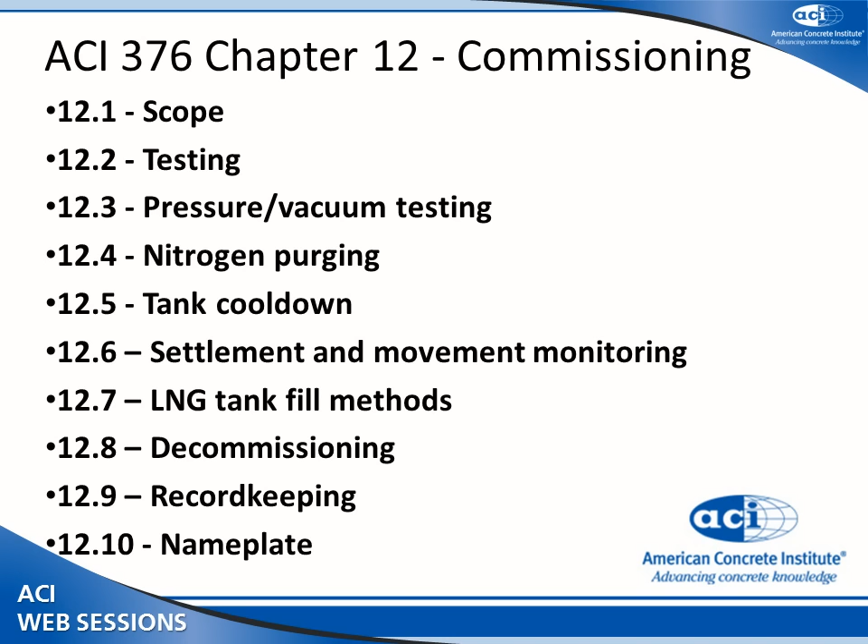What's written into the ACI code is testing of primary tanks where the inner tank is made from pre-stressed concrete. Where you have a metal inner tank, that's covered by other codes. API 620 would cover that. So testing of the primary container for leak tightness is required using either visual inspection at hydrotest, local pressure vacuum testing, or NDT methods. Typically a hydrotest is used for testing the leak tightness of the inner tank. Possibly above the hydrotest level, you can use the other methods.

Hydrotesting is required for the primary containment up to the design liquid level where the foundation conditions permit, but not less than 1.25 times the product load. So you want to test the foundation up to 25% overload. For metal tanks, sometimes they have a reduced hydrotest level due to limiting the steel thickness based on the product load rather than the hydrotest load. But for a concrete tank, it should go up to the design liquid level.

Testing for the leak tightness of the secondary containment is normally not required. As Nevin had mentioned, it's only a spill condition that should never happen, so testing for that leak tightness of the secondary containment is not done. If it was to be done, it would take a lot of special effort due to the insulation inside the tank and arrangement of the tank.

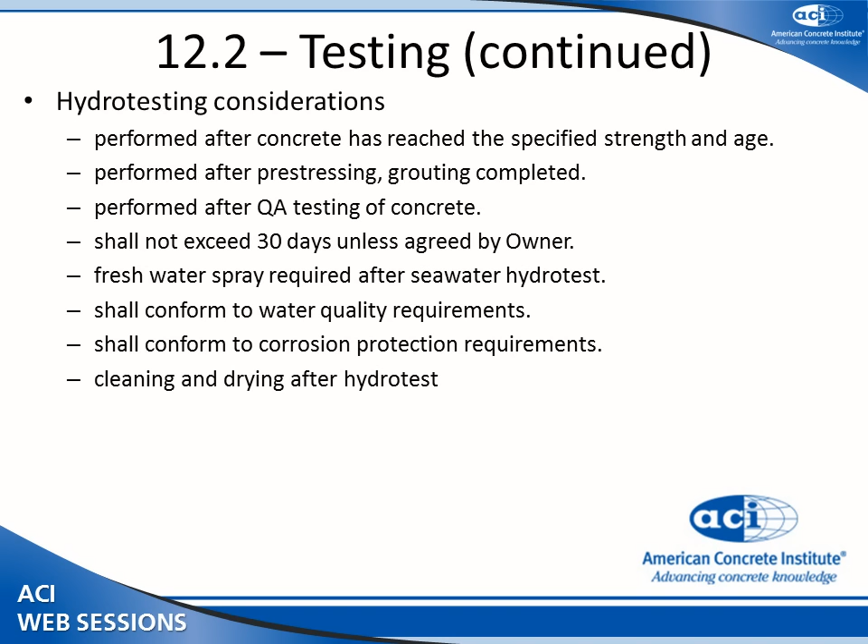Okay, pressure vacuum testing. Here we're talking about the outer containment, where the inner tank contains the liquid, the outer tank contains the vapor, and has to be pressure tested for 1 1/4 times the design pressure, held for at least 1 hour. Then the test pressure is reduced to allow for inspection for leaks. In addition, the pressure and vacuum relief valves are mounted on the tank and tested. The code also talks about the pump wells, which are tested to the piping code.

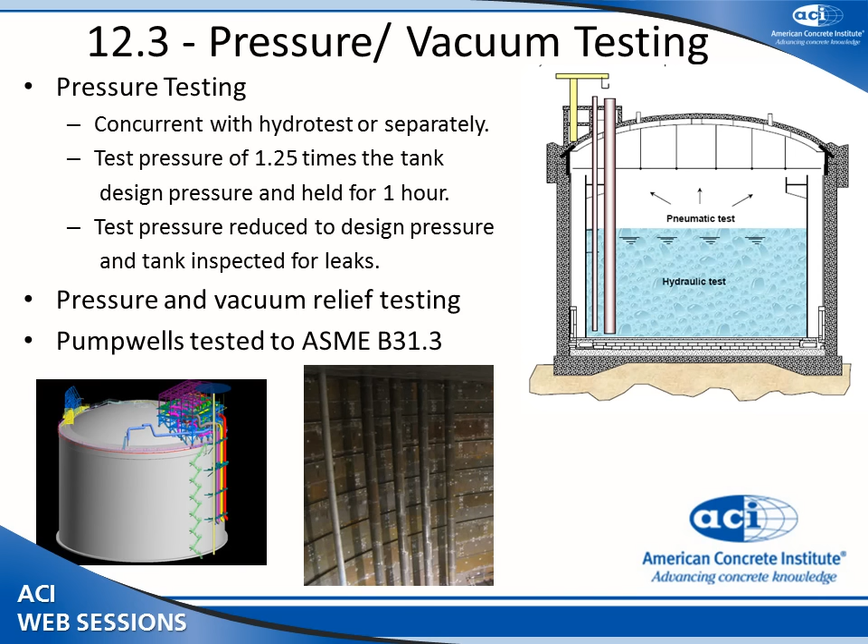Okay, after the tank is hydro tested and pressure tested, the tank is purged into service. And the idea here is to eliminate all of the oxygen in the tank to a certain level, make sure that the tank is dry. A complete procedure needs to be prepared for the purging operation. Oxygen level to be 8% or less. Tank to be dried with no standing water.

Inner tank is purged first, followed by the annular space. And it's completed when the oxygen level is less than 8% and the dew point below the required level, and held for 12 hours. And then the tank will be held under a nitrogen purge until time to cool the tank down and go into service.

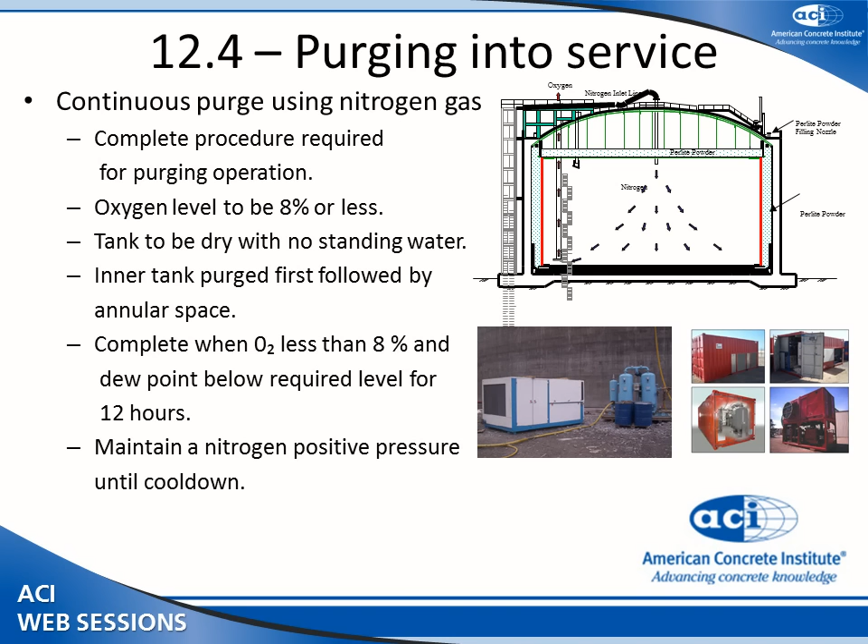And for LNG, typically, if LNG is not available, they may bring in a ship, or it may cool down with nitrogen. In any case, a procedure shall be set up to do that.

All right, settlement, movement, and monitoring. Differential settlement of the foundation before, during, and after the hydro test, and at the first fill of RLG shall be monitored. And also, that was the level monitoring system that Mike had talked about in his presentation. Also, monitor the inner tank lateral and rotational movement for use during and after cool down.

So this is something different, where you have to have some type of instrumentation inside the tank to be able to tell, when the inner tank cools down, what the movement is, as well as if that tank has rotated at all.

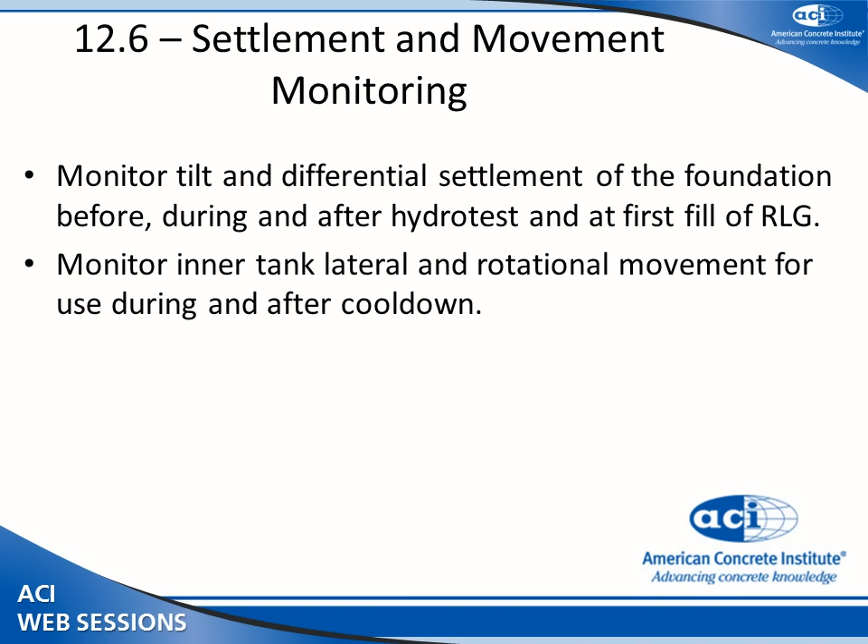All right, 12.7 is the filling methods. Typically LNG for an export terminal has a splash plate at the top, a connection at the top that allows for filling LNG at the top, where you're not worried about stratification of the LNG inside. On import terminals where you have different densities of LNG that might be brought into the tank, or long periods of time where LNG sits in the tank, typically top and bottom fill are provided.

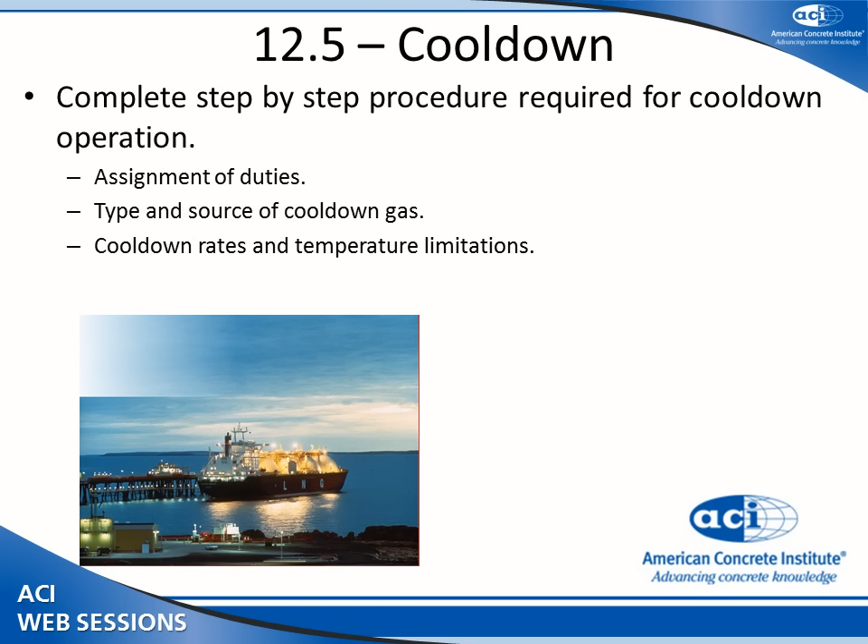It's construction of an LNG full containment tank, kind of time lapse from the beginning to the end. This was a project in Qatar that KBR built, and Mitsubishi was the tank contractor.

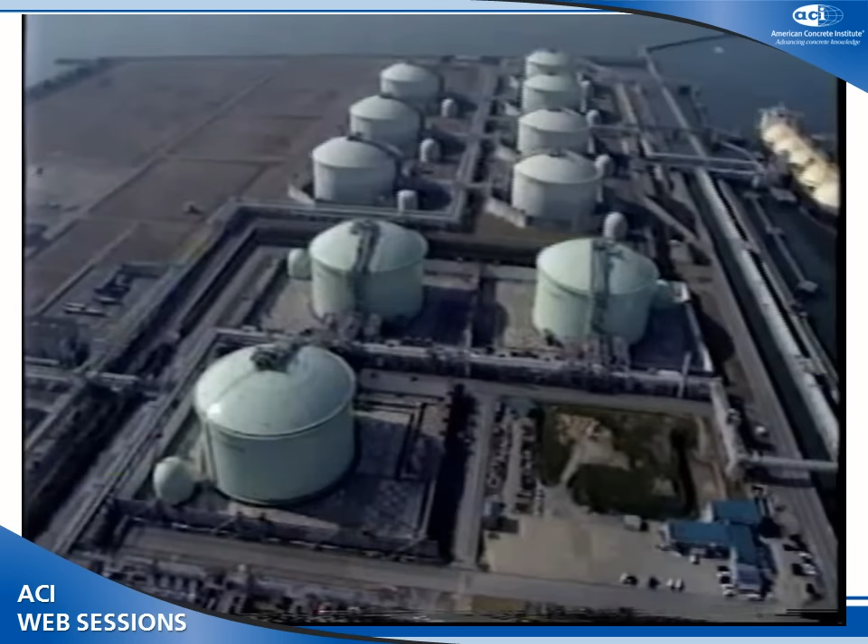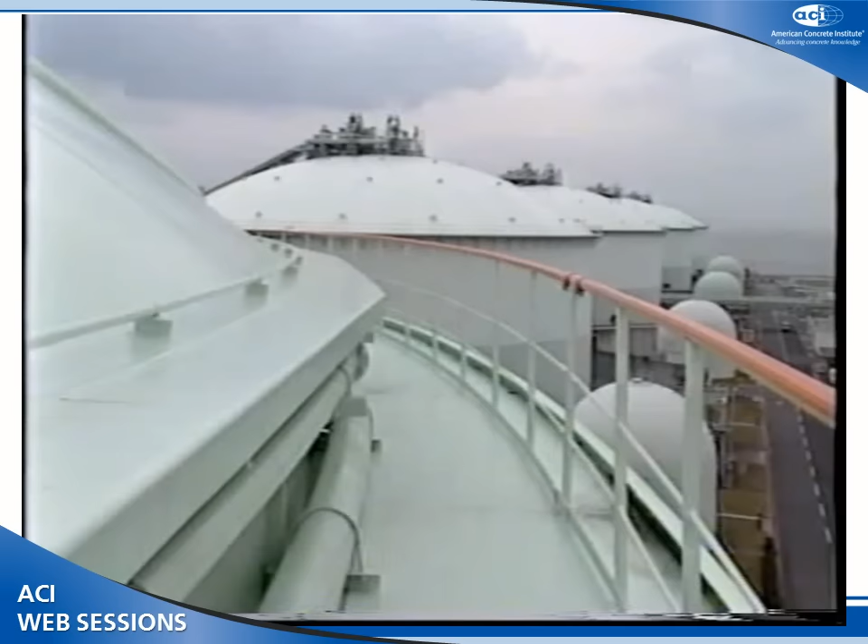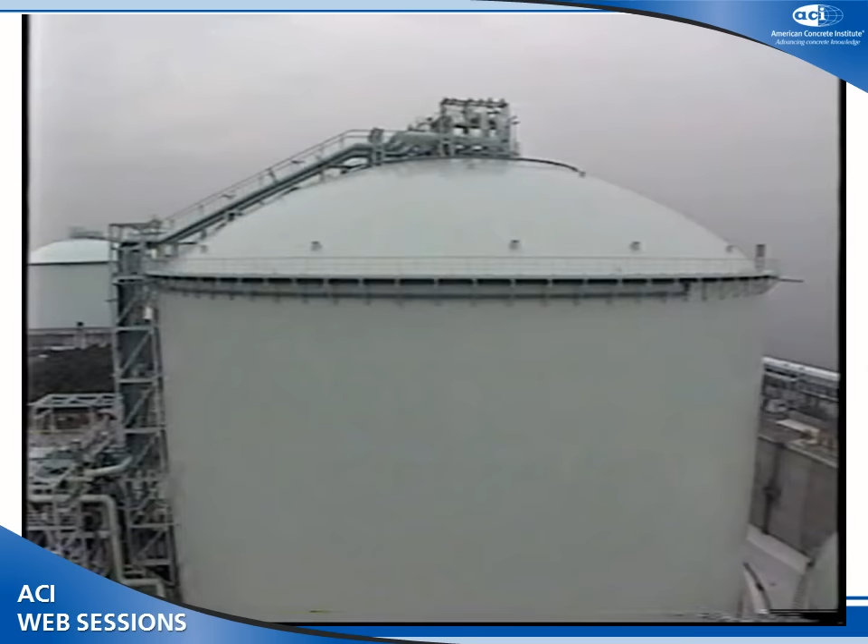LNG, liquefied natural gas. As the world becomes more environmentally conscious, demand for LNG as a clean energy source continues to grow. LNG is stored in LNG tanks at shipping and receiving terminals. As a manufacturer of LNG tanks, Mitsubishi Heavy Industries, or MHI, has completed more than 30 LNG tanks since 1977. These LNG tanks in Qatar were constructed by MHI.

The Middle East, the Persian Gulf, and Qatar. In this land of intense heat, MHI has completed 3 state-of-the-art LNG tanks. Ras Laffan LNG recognized our technology, experience, and proven track record. In 1995, the company awarded us a contract covering design to on-site construction on a full turnkey basis. Construction began in 1996, with 2 tanks completed in 1999 and the remaining one in 2000.

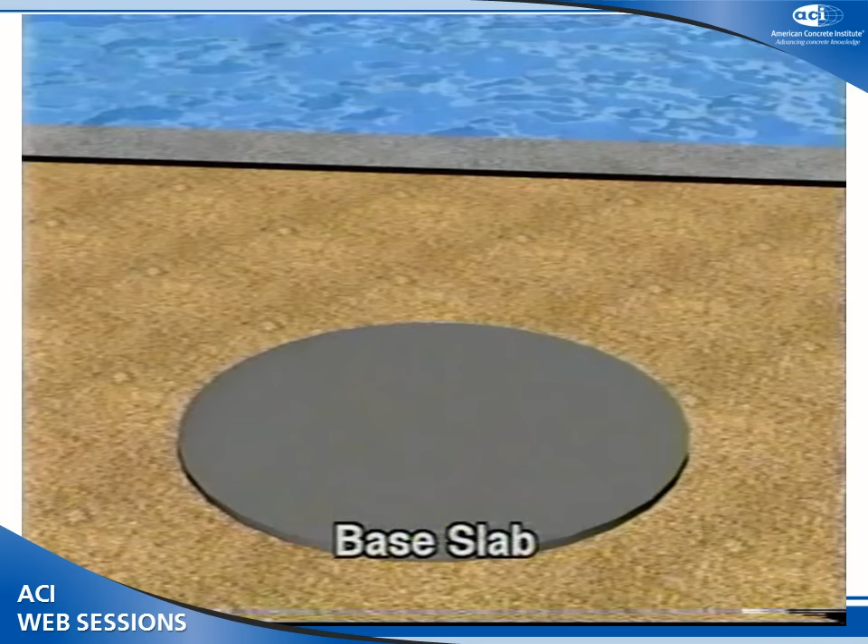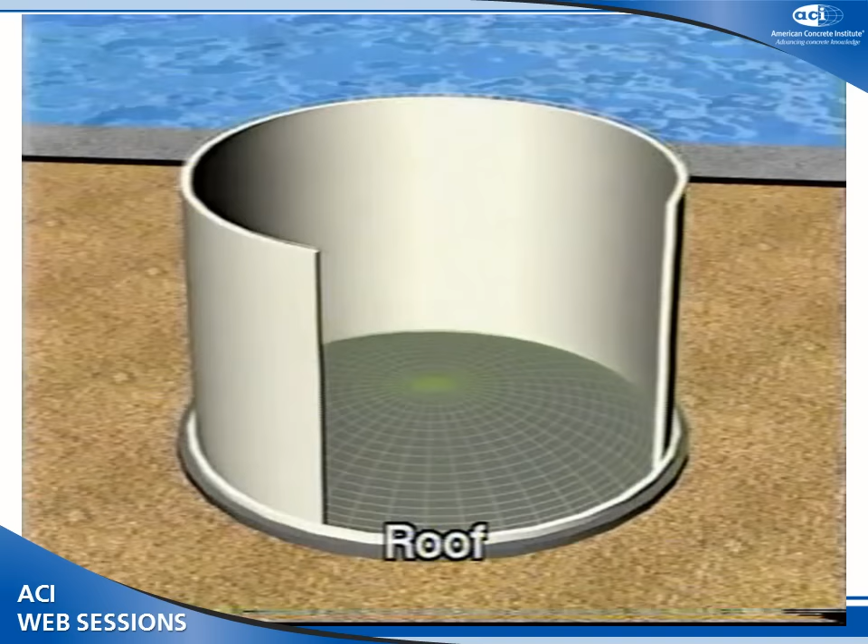Since the award of the contract, we have undertaken the design, procurement, fabrication, and construction of tanks with a capacity of 140,000 kiloliters under the plant EPC contractor JGC Kellogg.

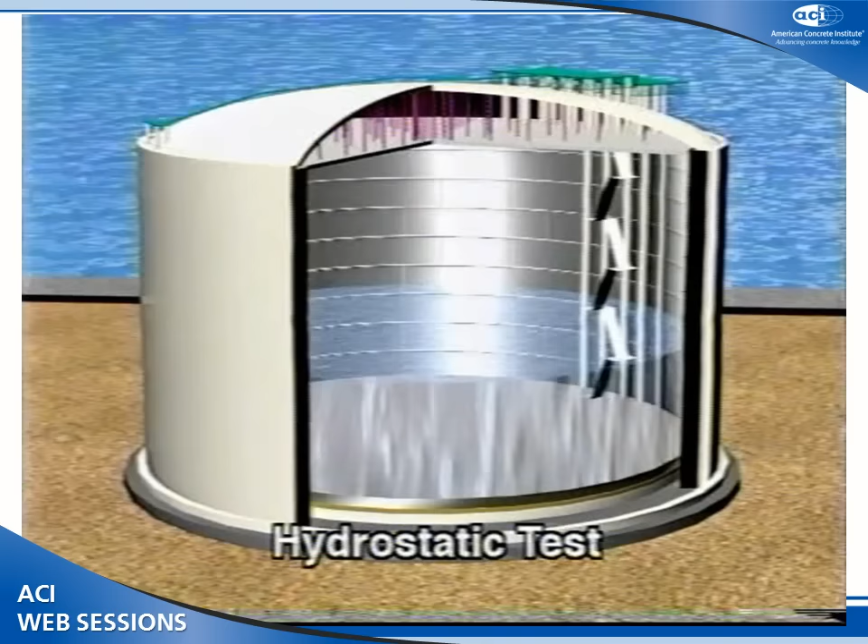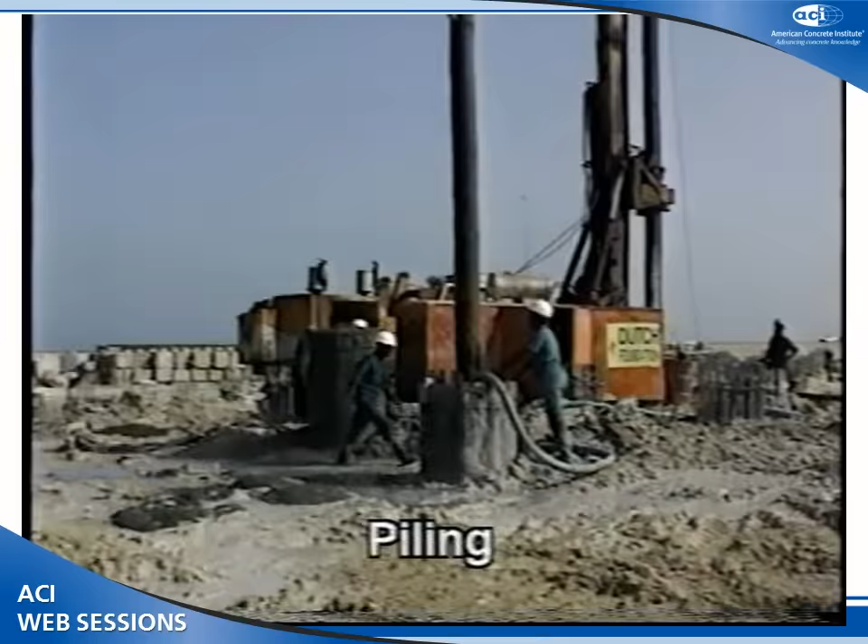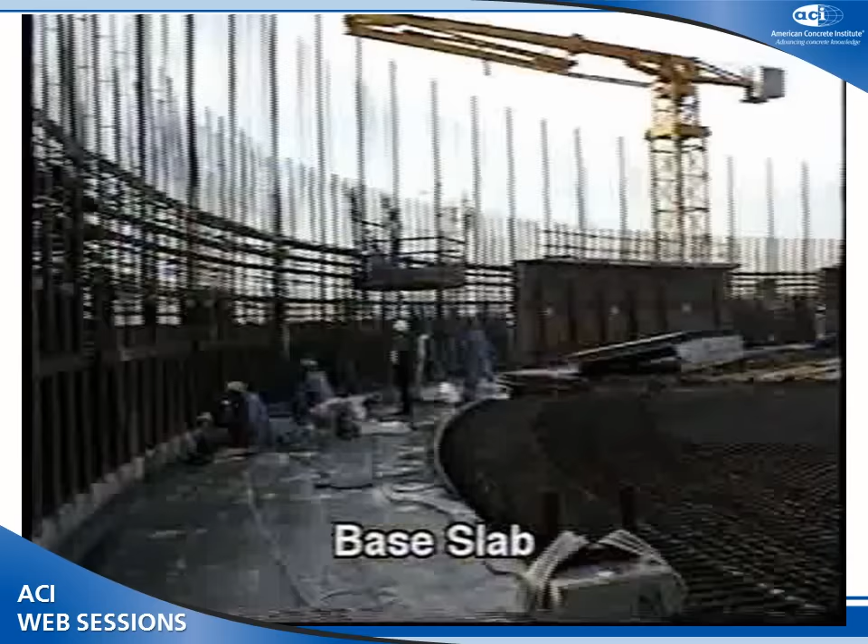Now let's take a look at the construction of LNG tanks in Qatar. Construction of LNG tanks begins with foundation work. The ground condition here in Qatar required piling. Over 400 piles are being driven into the ground to support tanks. After the piling work, the base slab construction is begun. The load of the fully filled tank is 120,000 tons. The slab plays an important role in distributing this load evenly over the ground.

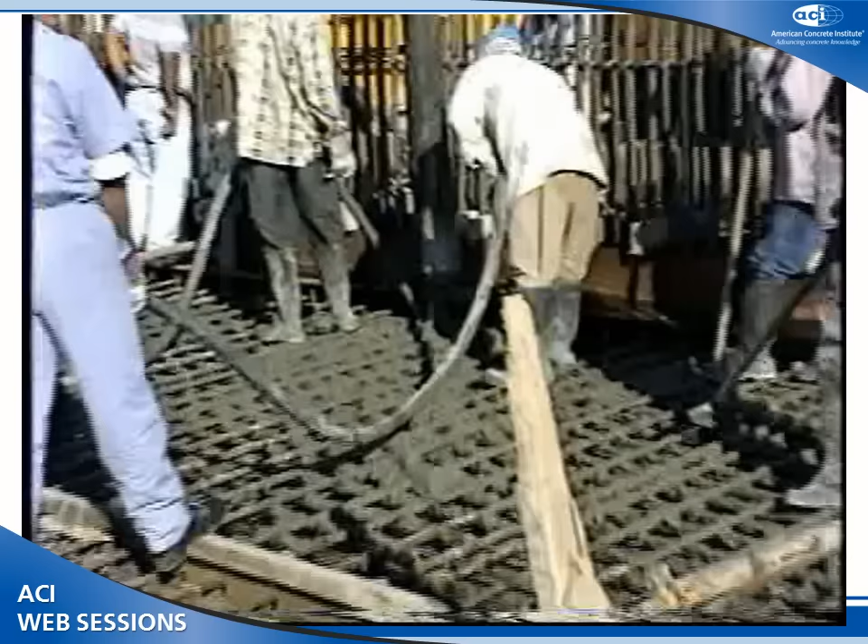The base slab work is followed by concrete wall construction, which is done concurrently with roof assembly work on the slab. After 6 months of construction, the concrete wall is raised to as high as 40 meters.

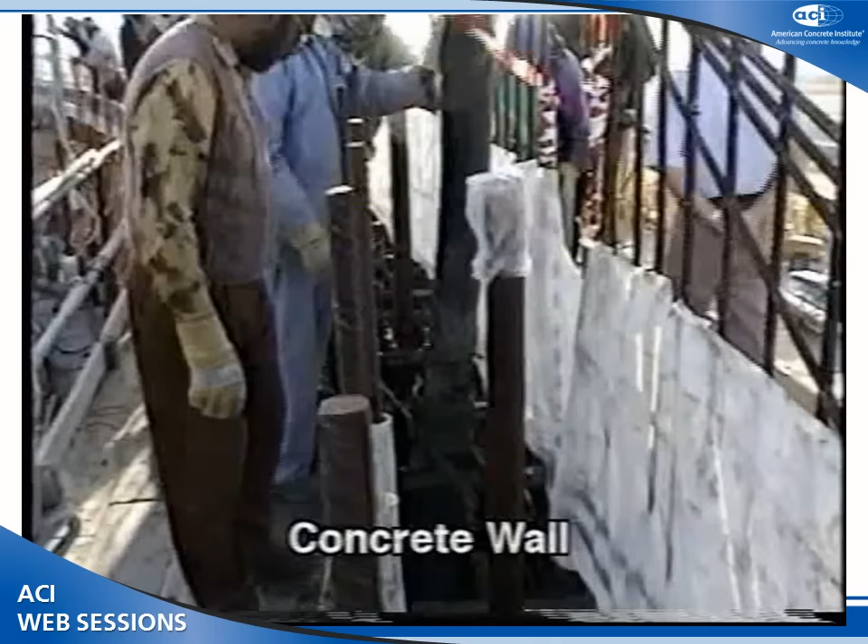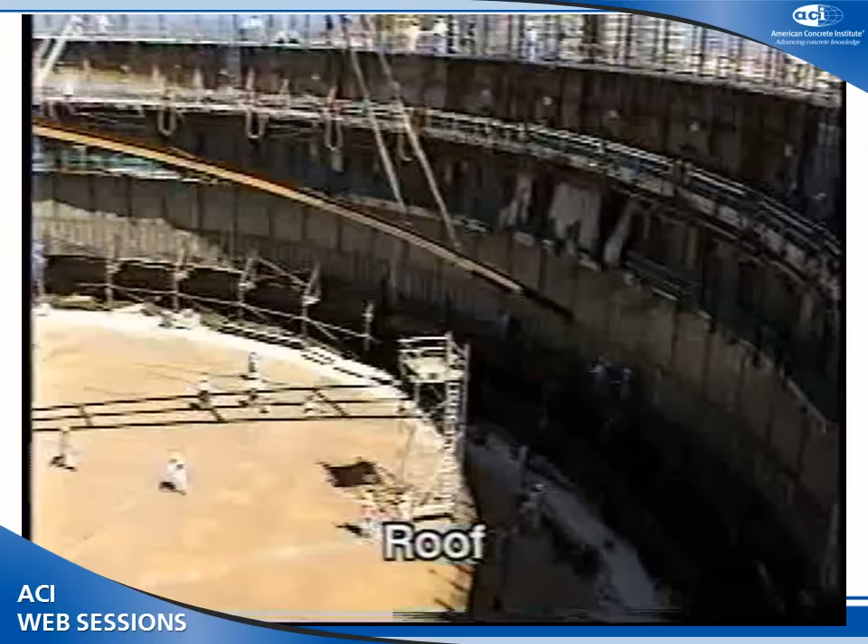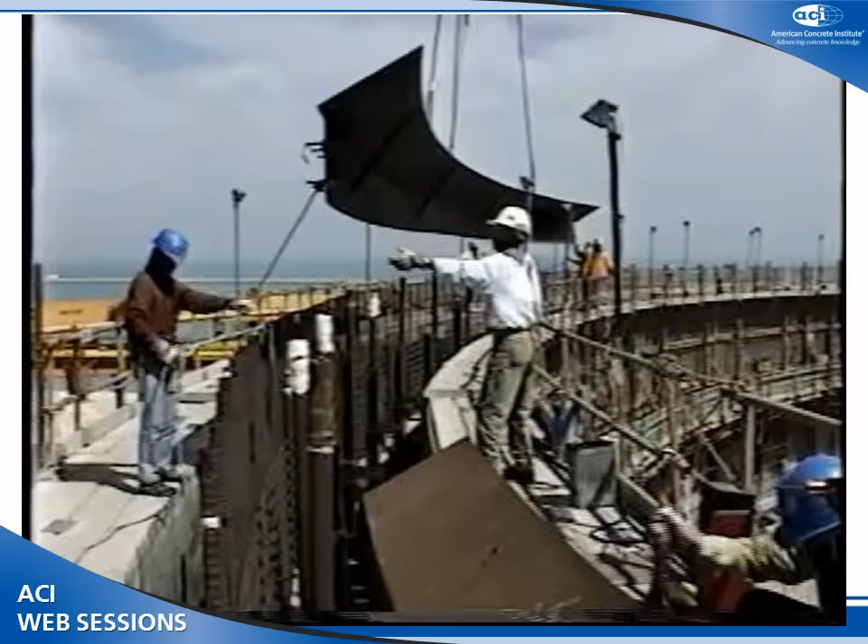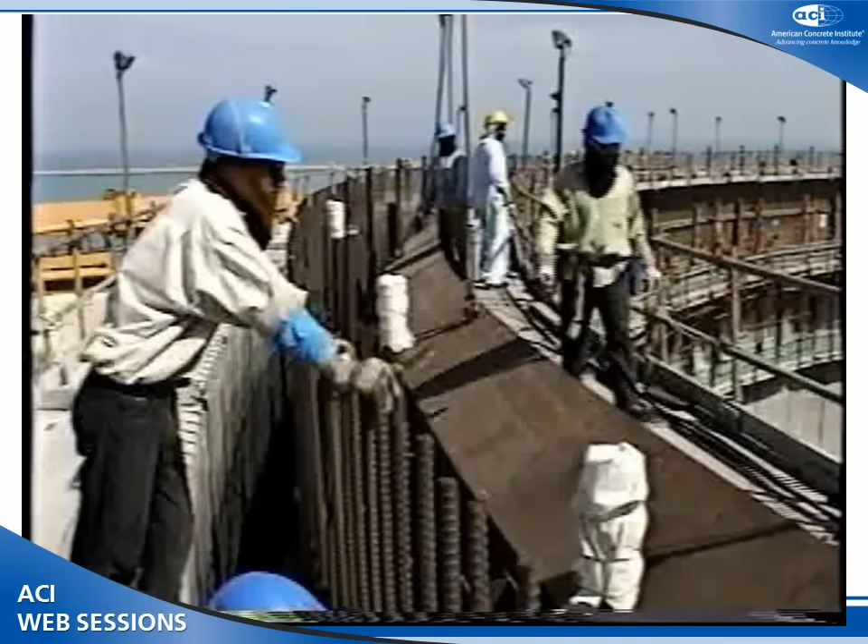Meanwhile, the roof is assembled at the bottom of the tank, surrounded by the concrete wall. The work process is optimized by carrying roof blocks in the tank. These roof blocks are temporarily built beside the tank. While the roof is being built, an aluminum suspended deck is placed beneath it, where the insulation material is to be mounted at a later stage.

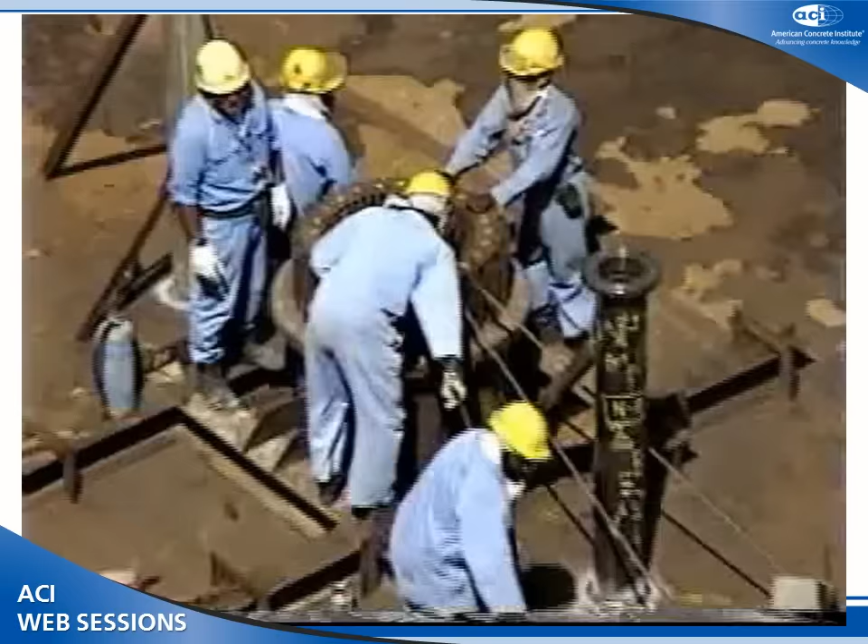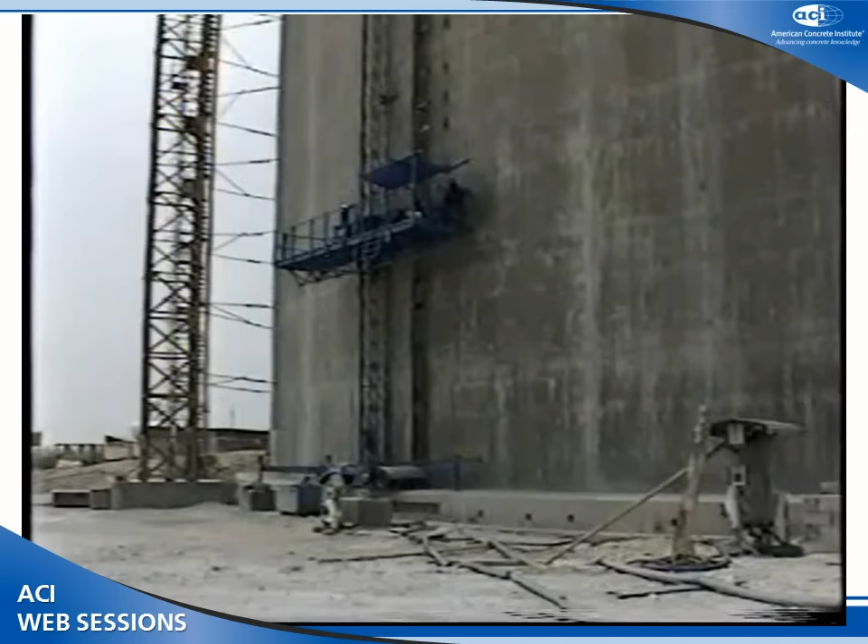The tank wall being built here uses pre-stressed concrete with extremely high rigidity. Ducts are run through the concrete during pouring, and then cables are run through the ducts when the wall is completed. By providing a set tension, the rigidity of the concrete structure is increased.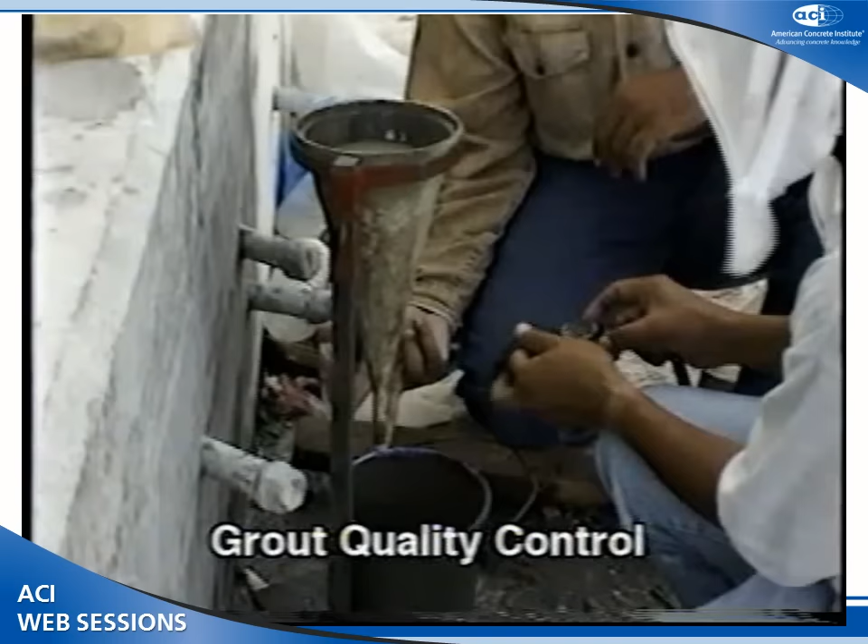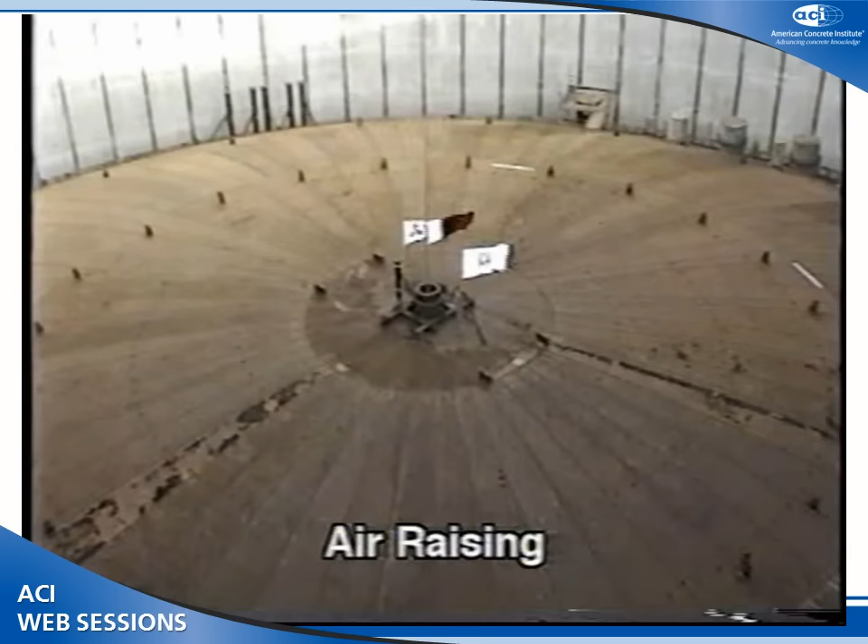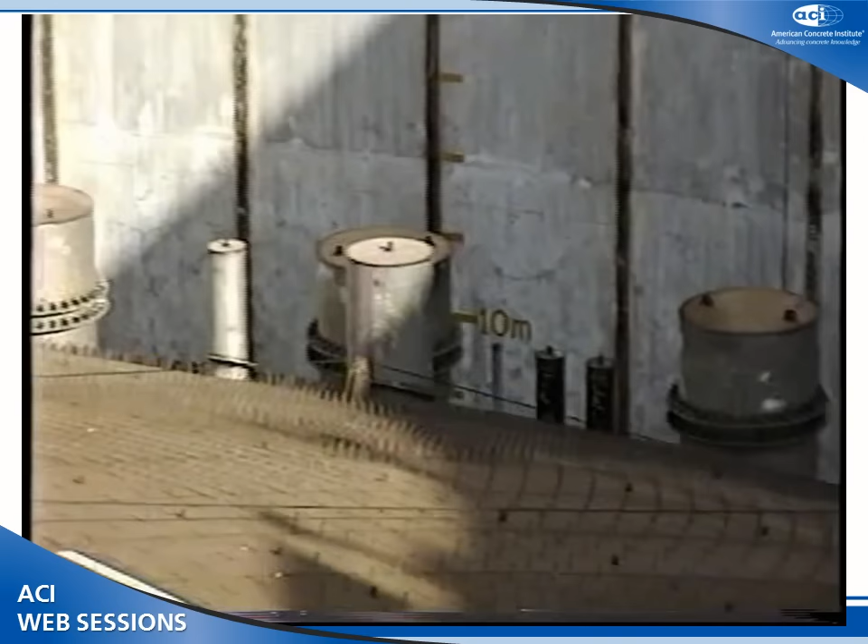The cables are installed in both the vertical and horizontal directions of the wall. When the concrete wall and the roof are completed, the roof is raised to the height of 40 meters using a technique called air raising. Air raising lifts the roof very slowly. This work continues over about 2.5 hours.

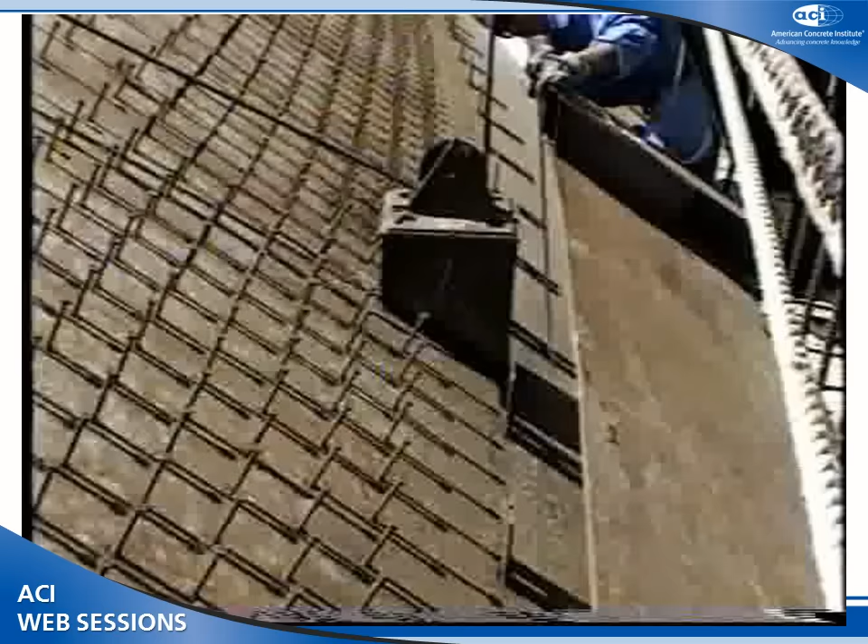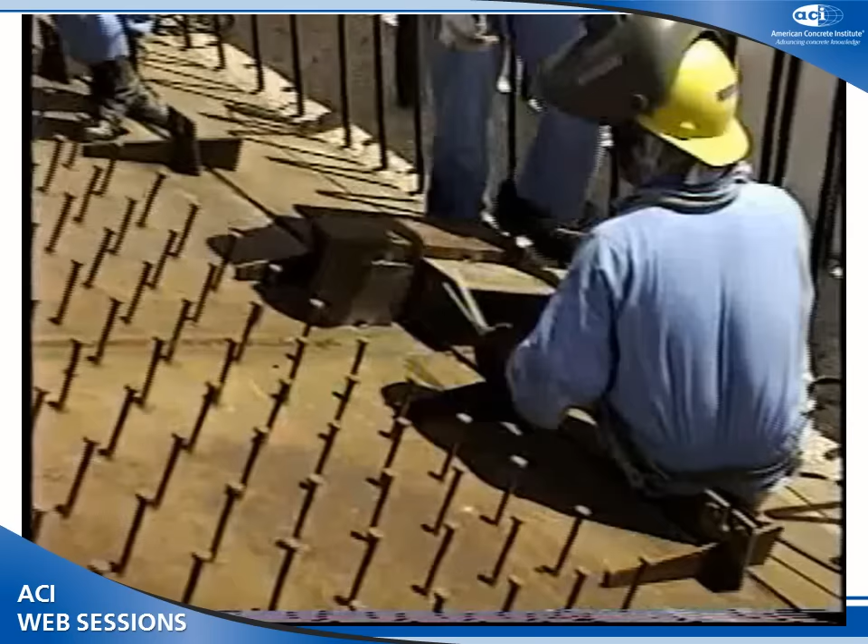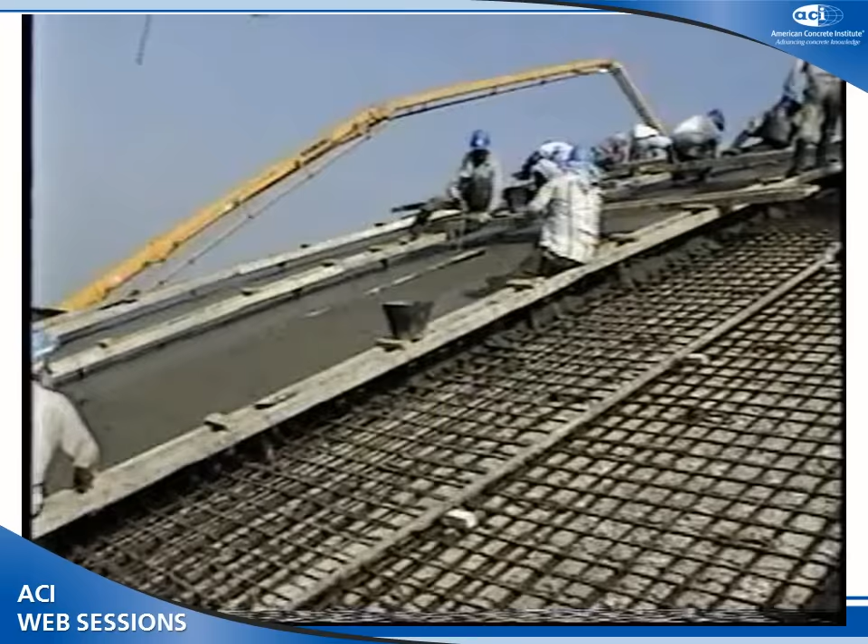The roof is fixed when it is raised to a set position. When the roof is fixed, concrete is poured on top. Next, a platform is constructed to mount the piping. Inside the tank, inner tank work begins. The inner tank stores LNG at minus 162 degrees Celsius.

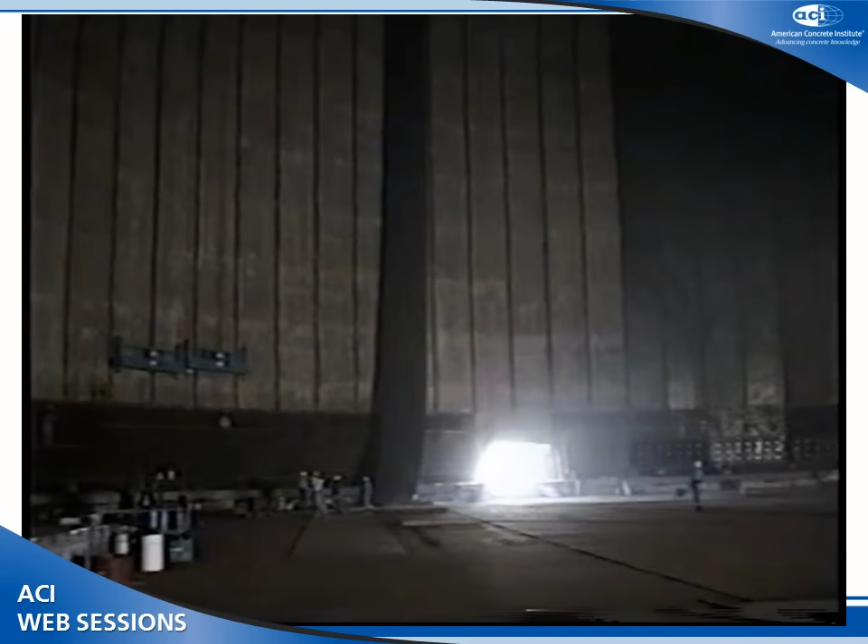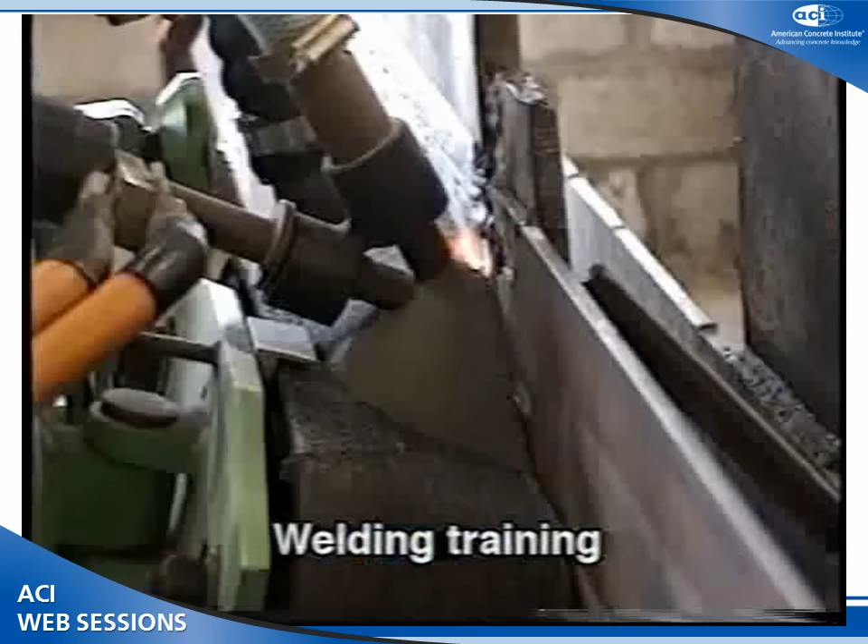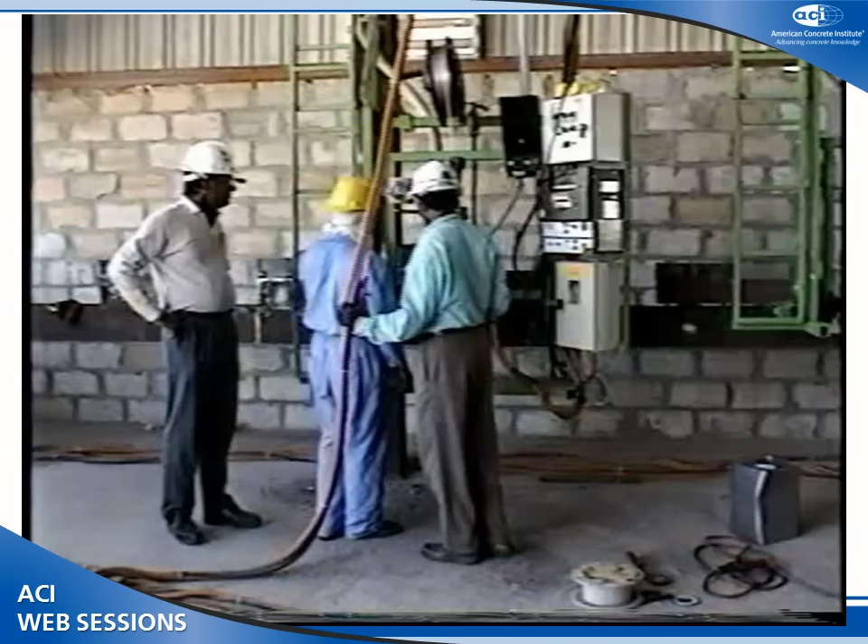For this reason, it must be made to very exacting standards. We take our utmost care to ensure the quality of welding. All welders must be thoroughly trained before they can work on a real tank. Here, workers concentrate on the work they are about to begin.

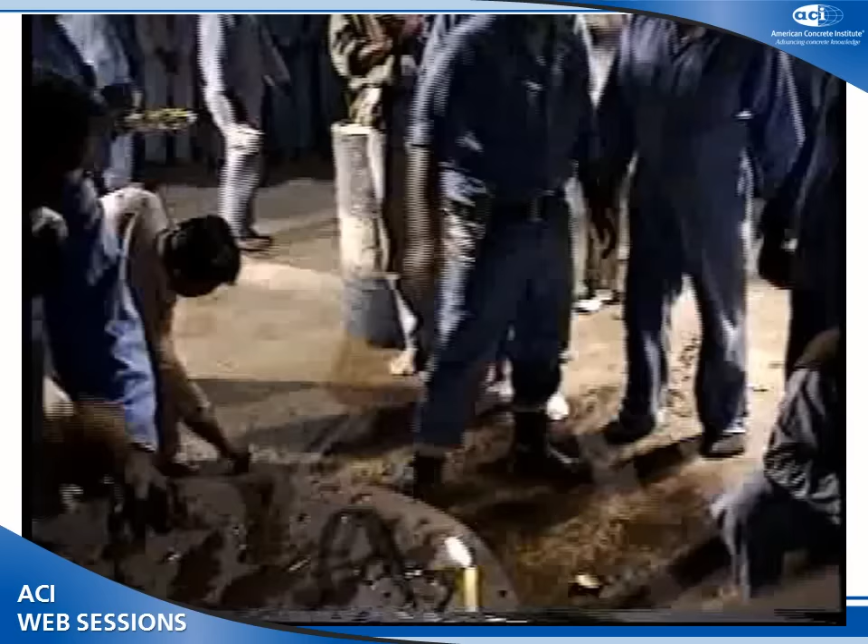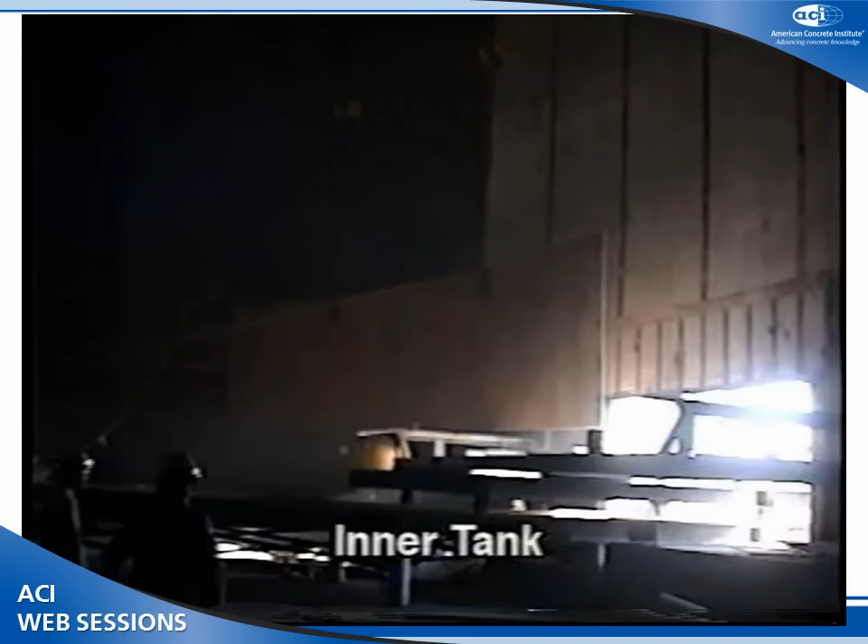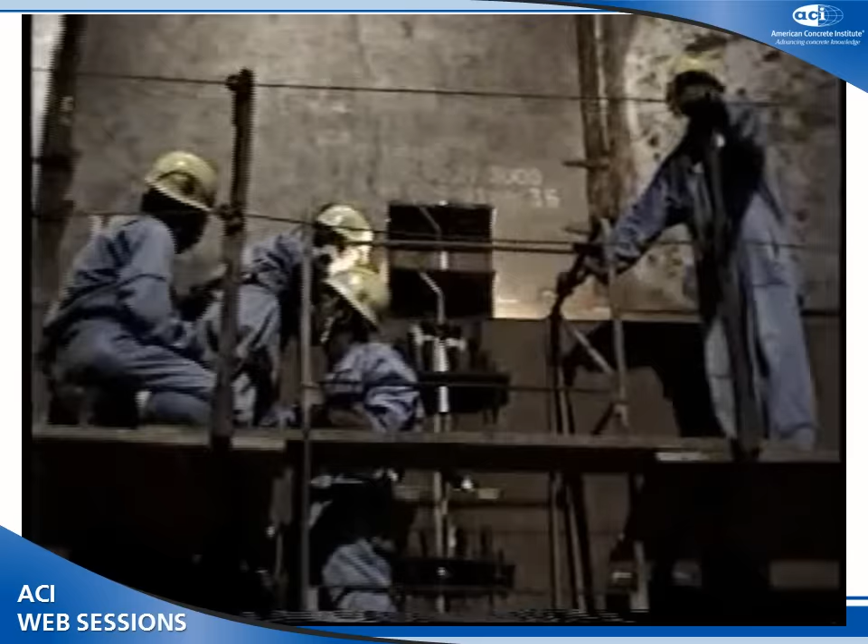The inner tank is made from a special material, which is 9% nickel steel. One by one, the pre-rolled steel sheets are brought through an opening into the tank. The delivered steel sheets are hoisted and placed in a specified position. The inner tanks in Qatar have a 10-layer structure. The construction of a tank combines many complex tasks.

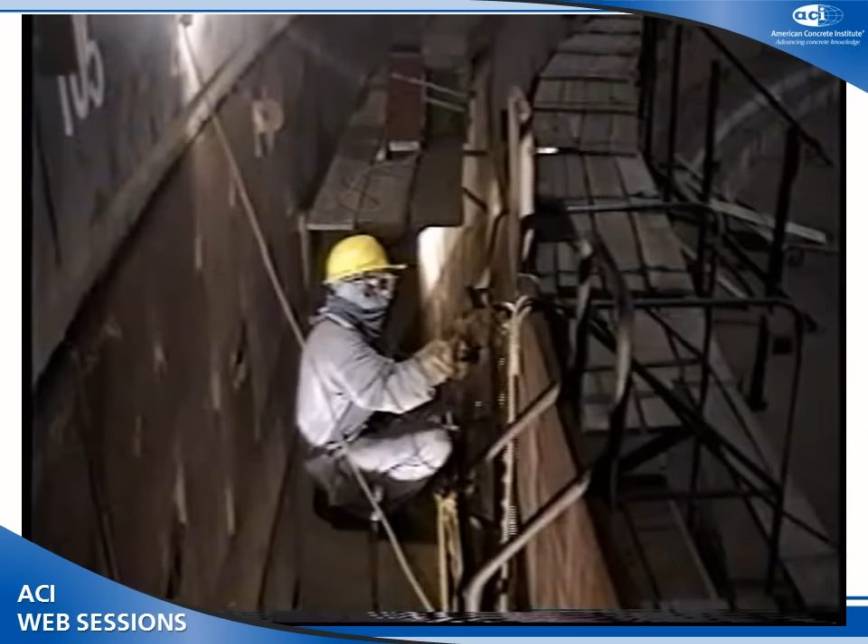While the inner tank work is underway, many different tasks are also going on outside the tank, such as piping, external stair construction, and coating.

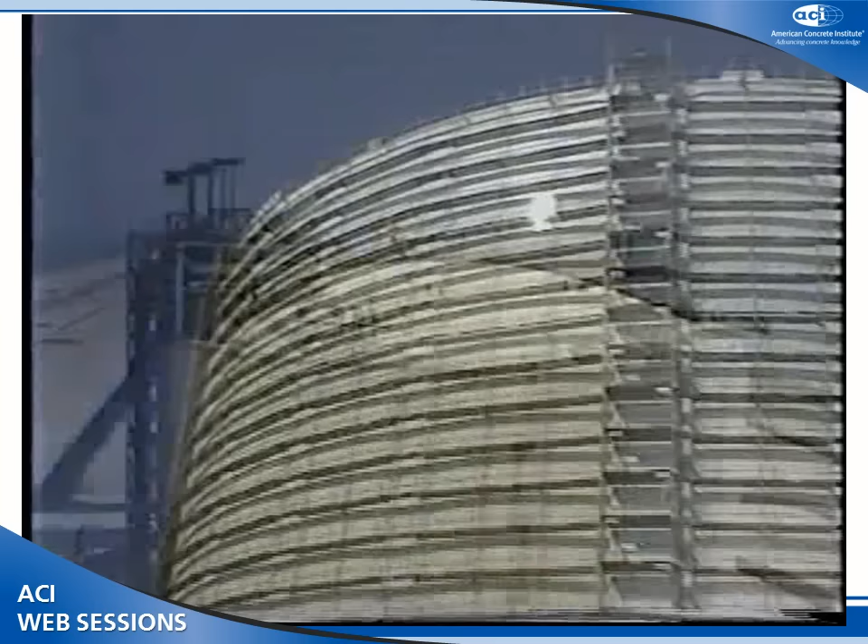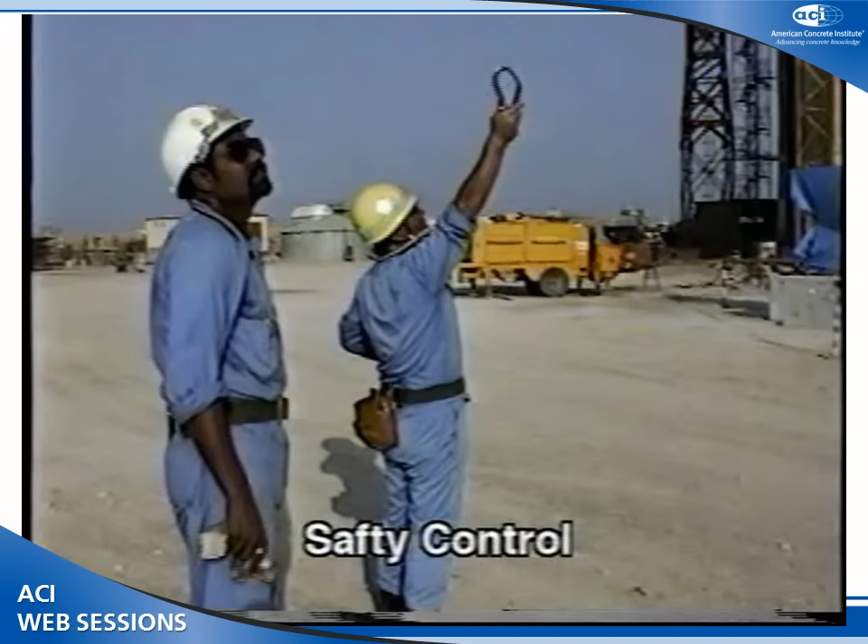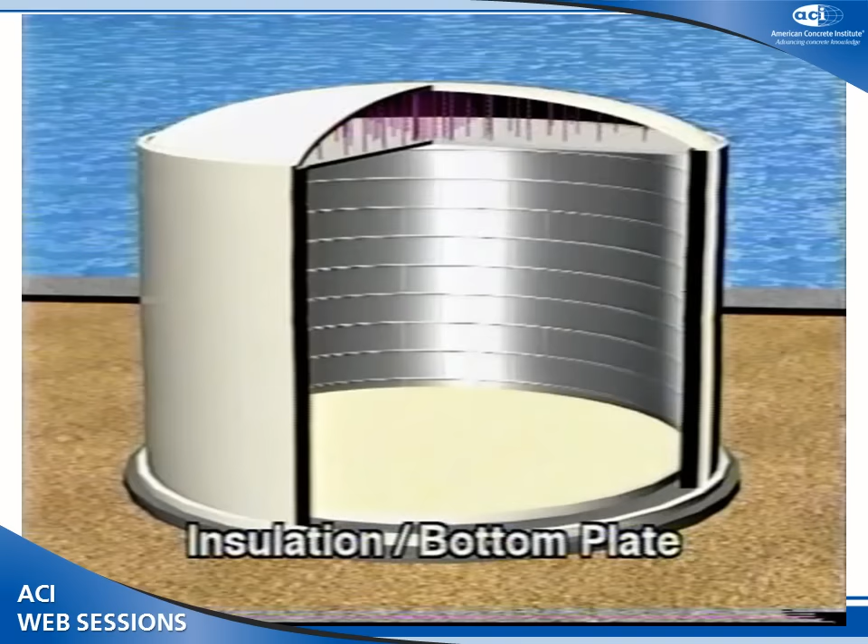Tank construction involves more than 800 people from over 10 countries working simultaneously. Particular attention must be paid to safety. MHI assigns a dedicated safety supervisor to work closely with the people on site to ensure that no accident occurs. During the inner tank work, insulating and construction at the bottom of the inner tank are also going on.

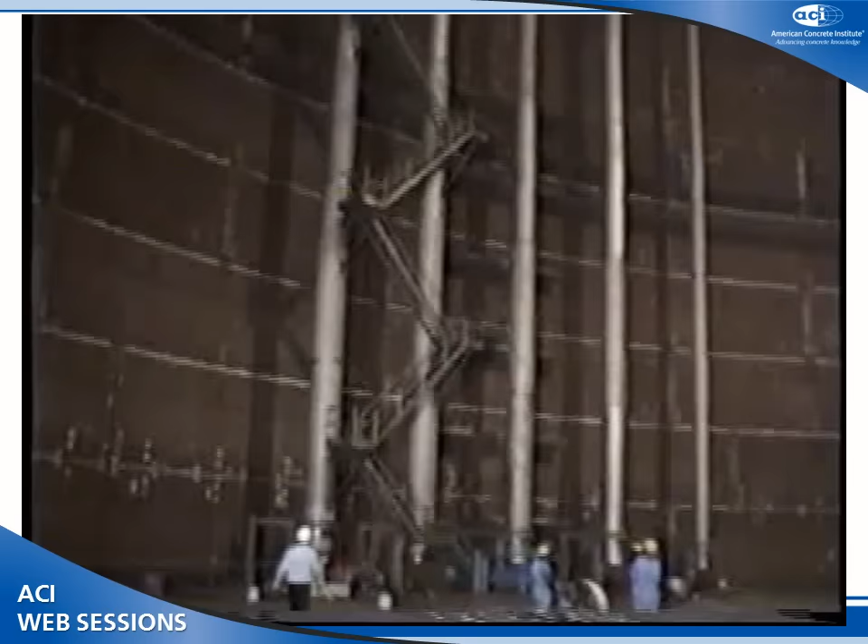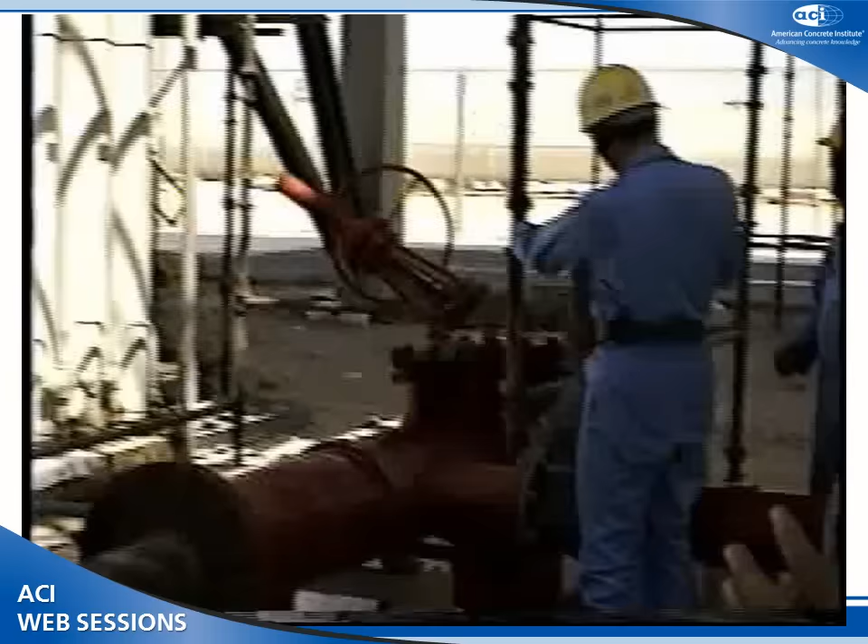When the work inside the tank is completed, a hydrostatic test is performed. The tank is filled with water to check mainly ground subsidence. Now the final process. Pump installation is underway.

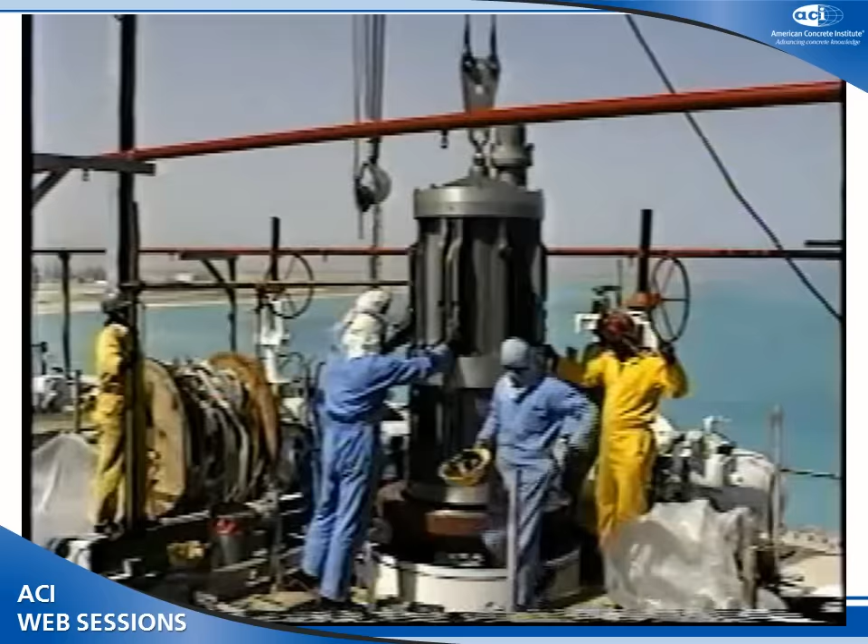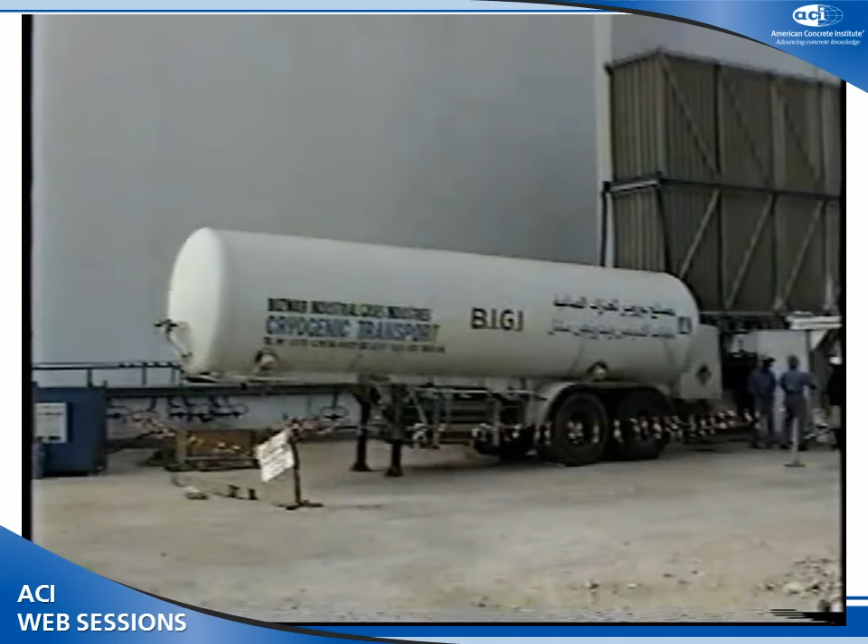Before putting the tank into operation, an O2 purge is performed. All the oxygen is forced out by filling the tank with nitrogen. A vaporizer for the liquid nitrogen is placed on site. This is the completed tank as seen from the platform. The enormously complex project required over 3 years of work, but now another high-quality tank is complete.

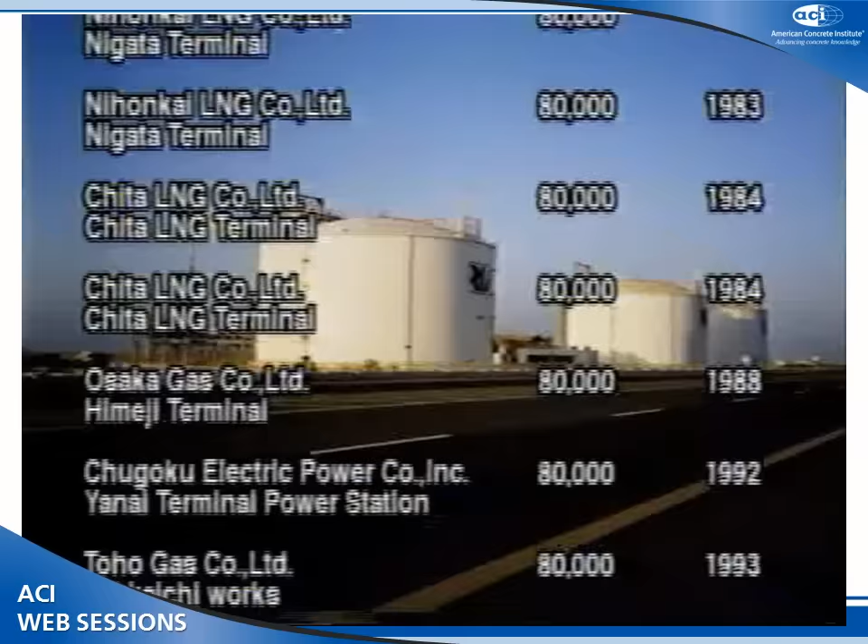In Qatar, we built 3 tanks of this type in succession. The Ras Laffan LNG tanks in Qatar, built by MHI. From these tanks, LNG is shipped all over the world. Our project execution ability was proven by the construction of these tanks. Based on this performance, MHI will continue to build LNG tanks around the world, contributing to a clean and stable energy supply for our planet.